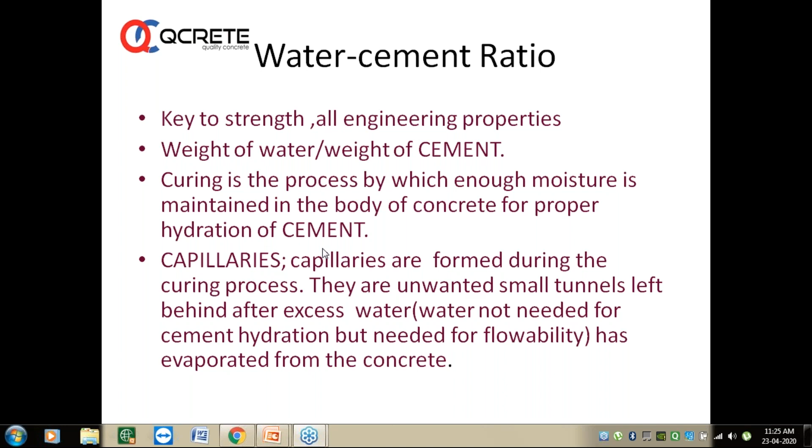So we have come to know the strength of concrete is inversely proportional to water cement ratio, and permeability is directly proportional to water cement ratio.

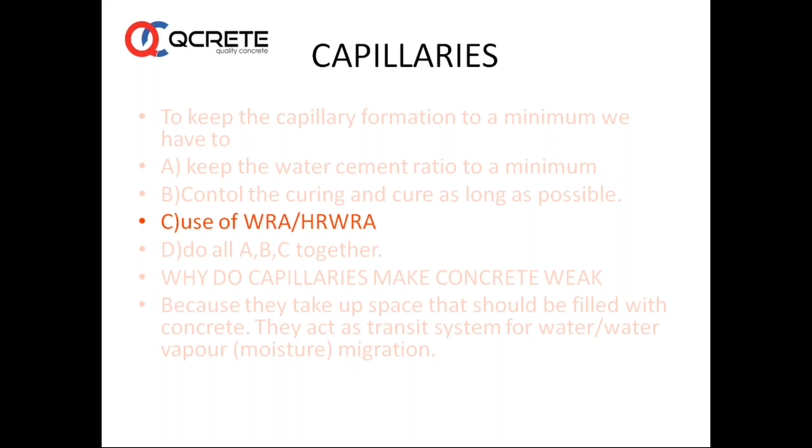In concrete, there are different kinds of pores, which again gives substantiation to the law of water cement ratio. One is capillary pores, which are formed due to physical evaporation of water, and then there are gel pores, which are within the calcium silicate hydrate gel itself, which is a byproduct of cement water hydration. And there are the next set of pores which are formed due to evaporation of water in between the cement paste and aggregate. So there are micropores, there are sedimentary pores.

What are sedimentary pores? Once the aggregate and cement harden, actually the concrete hardens, once this transition zone, the interface between cement paste and the aggregate, becomes weak due to evaporation of water or due to formation of some pores in the transition zone, it will attract more and more water to evaporate through this, and the tunnel or channel becomes bigger and bigger. These are also called sedimentation pores or sedimentary pores.

So there are several kinds of pores. The main important ones are capillary pores and gel pores. Gel pores are formed within the cement paste itself, that is the CSH gel itself. Now it is said that the gel pores are about one third, about 30 to 35% of the total amount of pores formed in the body of concrete.

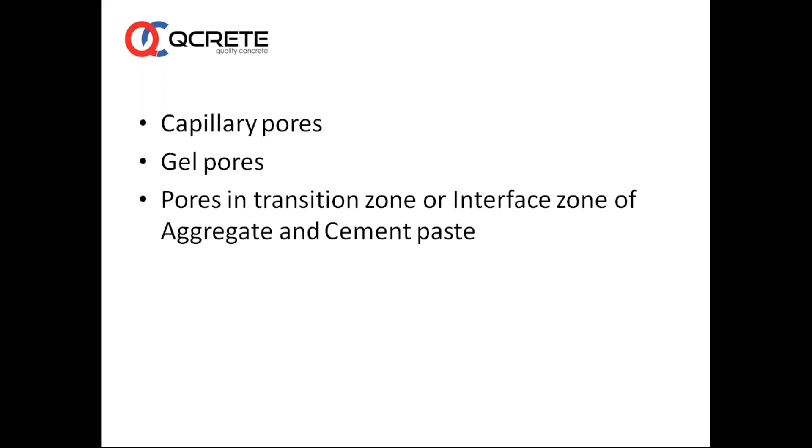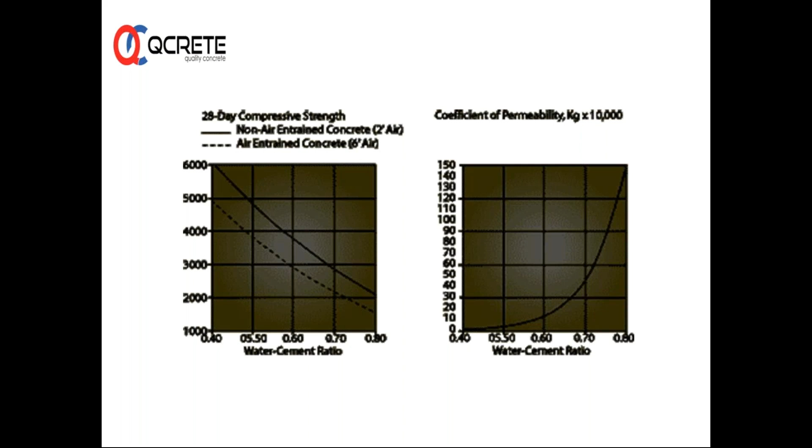So we are again talking about capillary pores. As far as permeability is concerned, it depends on the network of pores: their overall concentration, total volume, interconnectedness, and diameters of pores. The capillary pores are larger in diameter, maybe in microns. The gel pores are in nanometers, very small pores which can only be seen by microscope. Continuity in the network of pores determines permeability. So the concentration of the network, and whether the network is connected, and how the interconnectivity is there, all determine the permeability of concrete, which is very important.

See, more the permeability, lesser the durability. So that is why this factor is important. Next one.

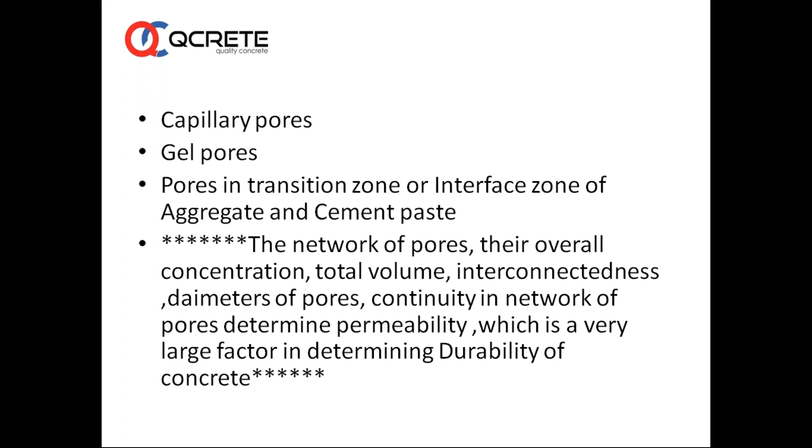So in short, it is completely essential to keep the water cement ratio down to as lower level as possible, to push the concrete to higher durability.

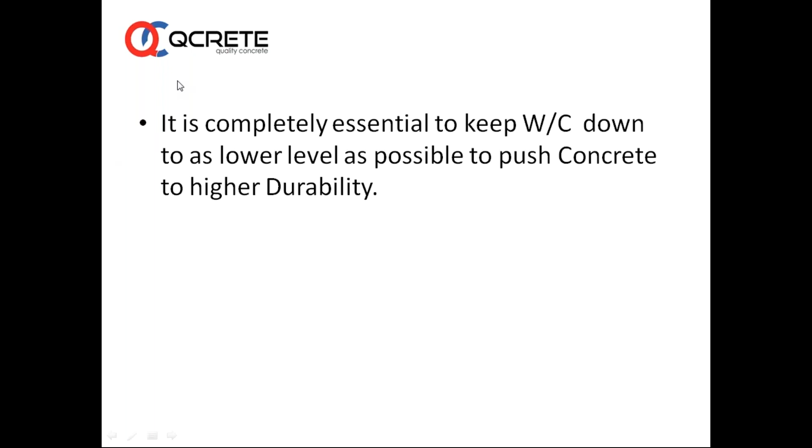OPC is the largest binder material used in concrete worldwide. Since its invention in 1824 by Joseph Aspdin, there have not been much structural changes, I mean there haven't been huge changes in the reactions or chemical compositions that cement is intended to do. There haven't been many changes built in. We agree the manufacturing processes have changed and evolved over time, but OPC remains as OPC for quite a long time now. And OPC has its own inherent problems.

OPC has its own problems. What are the problems with OPC? These problems that we are going to talk about are, you can say, villainous, like villains to the concrete. It underlines that OPC should not be used more, and it also tells us that there's no point in using more and more OPC. So we'll check about those parameters which are harmful to concrete in terms of durability.

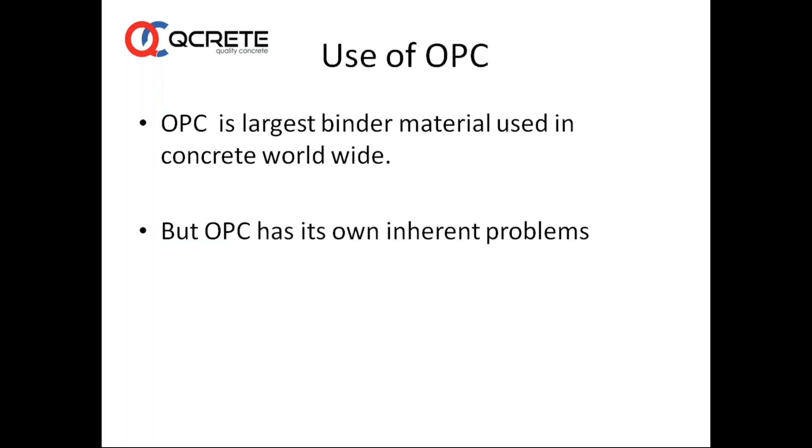So first point is OPC: higher the OPC, higher the heat of hydration. Now it is estimated that a concrete having cement content about 350 kg per cubic meter, and another mix design done at 450 kg per cubic meter - every 100 kg of OPC content increase tends to increase the heat of hydration between 13 to 14 degrees.

So as the cement content goes up, the heat buildup in the body of concrete increases. This is a very big concern in mass foundations, huge structures, thicker structures, raft foundations, bigger beams, bigger columns, high grade concretes - situations where cement contents are more. The problem is that heat buildup will be so much at the center, while heat will be lesser near the surface of the concrete, because the surface is closer to the atmosphere and influenced by it, resulting in lesser temperature. So if the difference between core temperature and surface temperature goes beyond 13 to 15 degrees, thermal cracks will develop in the body of concrete, leading to deterioration of the structure. So heat buildup in OPC mixes is a problem. We need to be very careful, especially if such cements are used in mass foundations, raft foundations, and things like that.

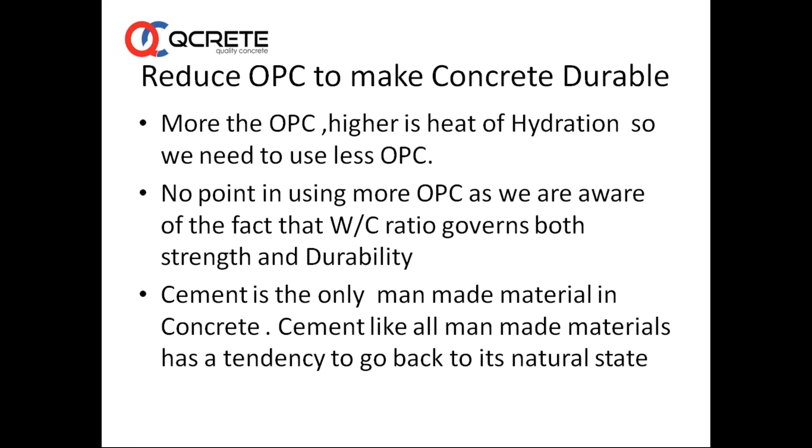Next - OPC production is accompanied by a huge amount of carbon dioxide production, which is a greenhouse gas, and is said to be one of the major factors responsible for global warming. We all know that more carbon dioxide and other gases produced by human activities - automobile industry, burning of fuels for various purposes, and cement production - all these things put together are, you can say, spitting carbon dioxide like venom into the atmosphere, disturbing carbon dioxide levels and other levels in the atmosphere, and being responsible for heat buildup on planet Earth.

It is said that if the same things continue for longer times without any change, by cement producers and other manufacturers manufacturing in such a way that they are all responsible for production of more carbon dioxide, it may lead to higher buildup of heat, which will eventually cause huge amounts of ice to melt in places like Antarctica, wherever the ice is there, and the sea levels are set to go higher, and then coastal areas will be almost submerged, and there will be havoc, mass destruction will happen actually.

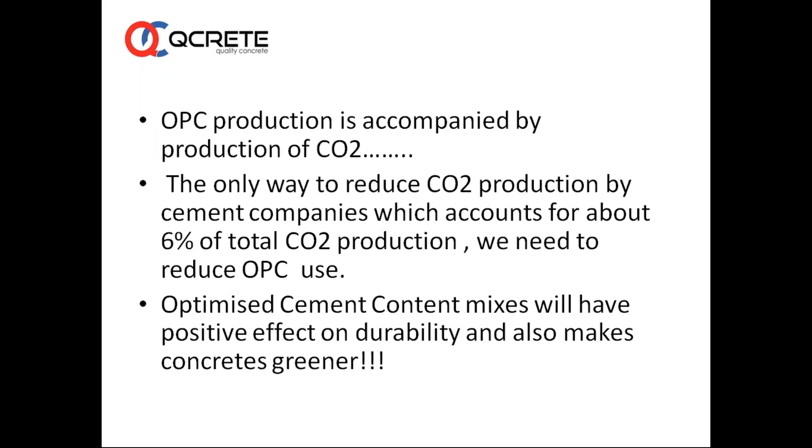So OPC and steel, you could say are on one side, the villains. They have aided taller constructions, bigger constructions. On the other hand, durability is a question mark as far as these materials are concerned. When you have OPC concrete with embedded metal, that is the problem. That is where corrosion starts, and that is where the problem starts.

So, probably the builders of these pyramids knew that they should not use such materials, especially with embedded metals. And that is how they have won a race against time. 5,000 years is not a small time, it is a huge time. These structures have passed their life, against rain, shine, whatever it is.

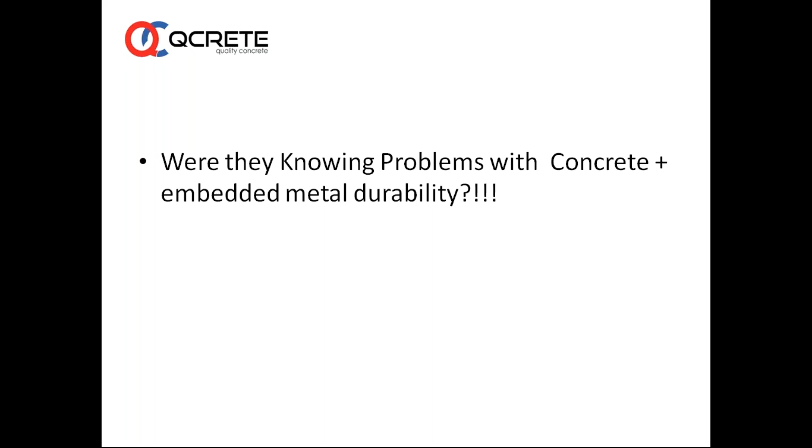So we cannot just reduce the OPC content to make durable concrete. We need the help of chemical admixtures. We need to use a certain dosage of chemical admixtures, HRWRA, whether it is SNF based or PC based or whatever it is, to bring down the water cement ratio. Bringing down the water cement ratio is dependent on the water reducing capability of these admixtures.

PC admixtures, the latest generation of admixtures, give a water reduction of about 30 to 40%. So now it is easy to produce concrete with water cement ratio of 0.25, pumpable concrete, easily placeable flowing concrete, which was never possible earlier. So if you want to push the concrete to higher levels of durability, you need to have low water cement ratio. That can be achieved by using high performance, high range water reducing admixtures.

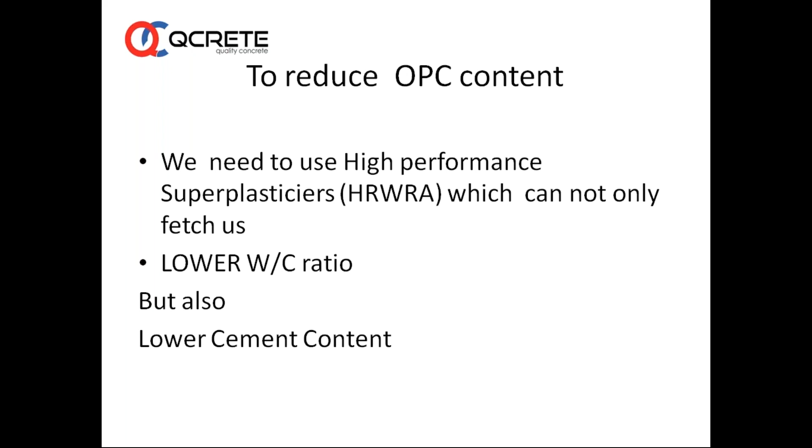The next set of materials which are used to push the concrete to higher level of durability are mineral admixtures. As everybody knows, pozzolanic materials are not a new material.

Pozzolanic materials were first found in a village called Pozzuoli in Italy 2000 years back. Romans used this in a very big way. You have many structures like the Roman Colosseum and other structures, including some non-Roman structures from 300 BC, where it is said they used some form of volcanic ash, mixed with lime and animal blood or other materials like horse hair, to make durable plasters and concrete-like material. So mineral admixtures or pozzolanic materials are not a new phenomenon; they have existed for quite some time now, and they have made a significant impact on the development of durable concrete.

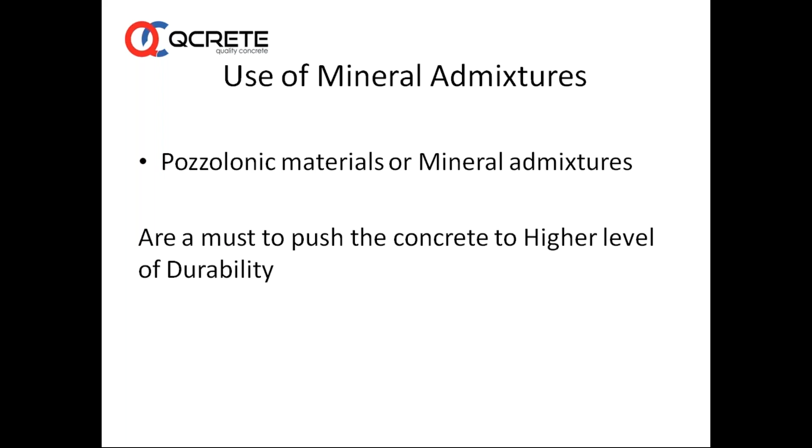So by using SCMs, what benefits do you get to make concrete overall durable? Permeability, resistance to chlorides, resistance to sulfates, carbonation, alkali silica reactivity, drying shrinkage, creep - all these properties are improved significantly or kept at the same level by using SCMs. Some parameters of durability are kept at the same level, whereas many important properties are enhanced significantly, especially permeability, resistance to chloride and sulfates. All these are enhanced significantly when we use SCMs, by which the SCMs push the concrete to a higher degree of durability.

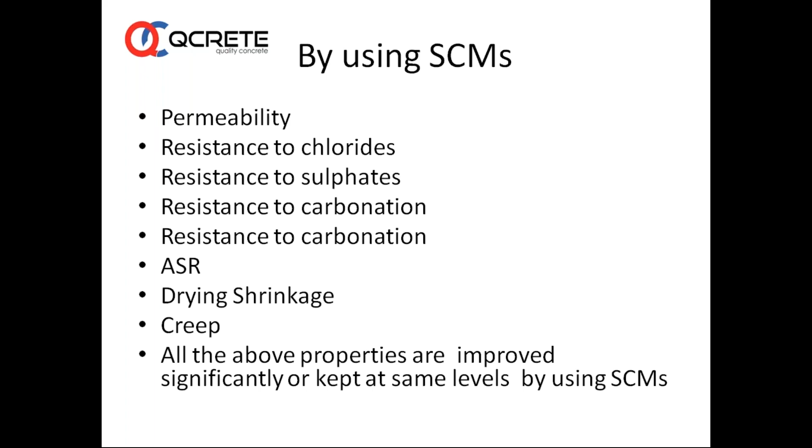So, reduced permeability. When the pozzolanic materials react with the products of hydration of cement, which is free lime or other things, then in the capillaries, further calcium silicate hydrate gel goes on developing and depositing itself, making the concrete denser and denser as time elapses.

So that means concrete with any SCM, whether it is fly ash or GGBS or microsilica or metakaolin or rice husk ash, the phenomenon is almost similar. Small changes will take place, but it is not significant. Whenever you are using any of these materials, there will be secondary hydration going on. Because of the secondary hydration, this calcium silicate gel production will be continuous as long as moisture is present inside the body of concrete, as long as calcium hydroxide is present inside the body of concrete. The reaction will be continuous, and the development of CSH gels will be a continuous ongoing process, a work in progress.

These CSH gels will go on filling up the capillary pores - we already talked about the capillary pores, different types of pores and all. So it will go on filling up these things, and as the concrete ages, the pore volume decreases. Professor R.N. Swamy has talked about this.

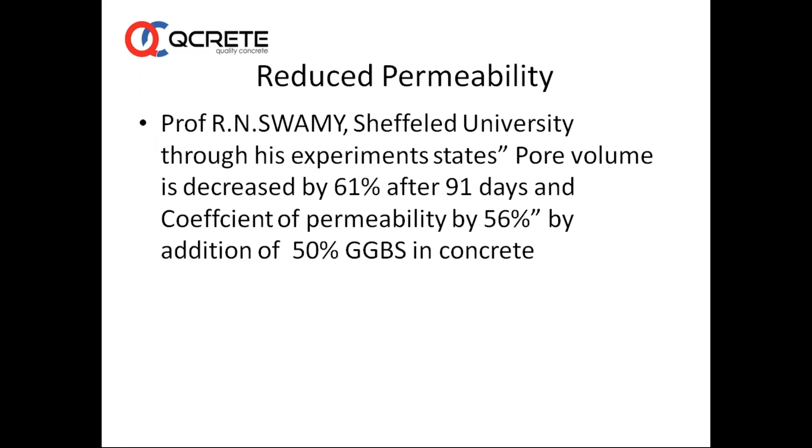The most significant effect of SCMs or pozzolanic materials is in reduction of ingress of chlorides, or in other words, resistance to chlorides is significantly enhanced when we are using SCMs.

There is no way OPC can compete in this section. We need to remember, if you want to make simply a durable concrete, forget about OPC, because we cannot achieve very high levels of chloride resistance with pure OPC. You need to do a lot of trials, a lot of mix designs, to achieve very high resistance to chlorides.

Resistance to chlorides is also measured by ASTM C1202, a test for resistance to chlorides measured in coulombs. A value of 2000 coulombs is said to be moderate, 1000 coulombs is good, 500 is very good, and below 500 is excellent concrete. This single factor alone can indicate that the concrete is going to last a very long time.

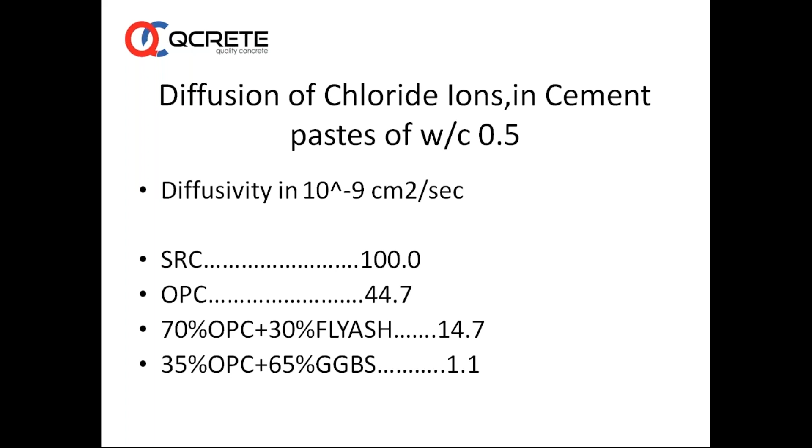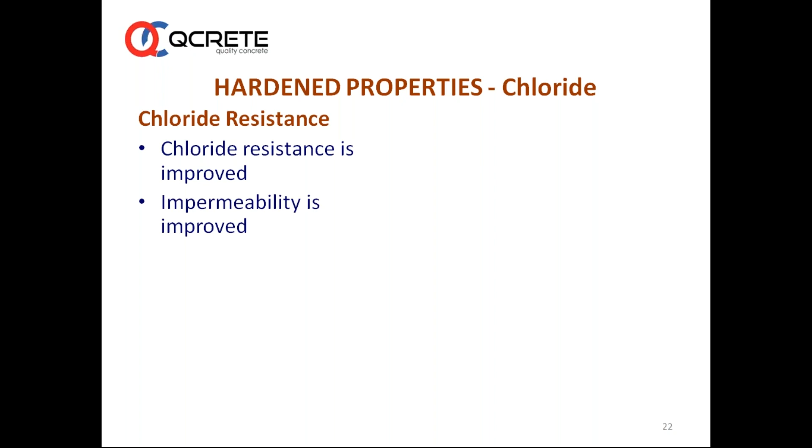This slide shows that at a depth of 25 mm, the chloride content is about 1.75% when using no GGBS or fly ash. But when we use about 60% GGBS, chlorides are almost nil at 25 mm depth - there is no availability of chlorides. So you can see from this graph that the resistance to chlorides is significant, and this is one of the best ways of making concrete durable in an environment with high chloride exposure.

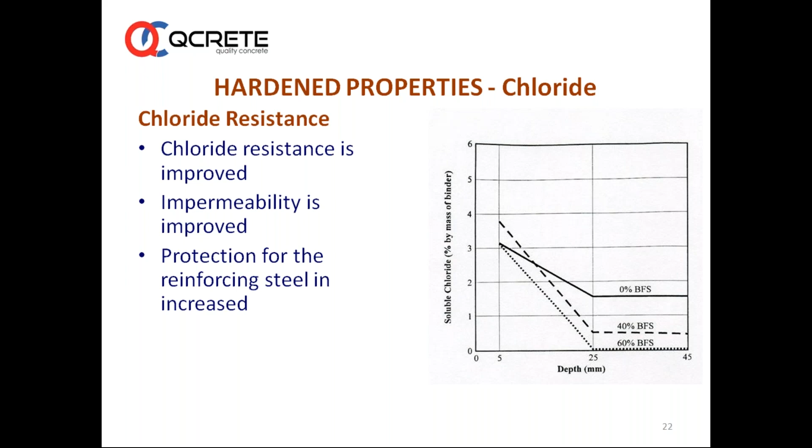It is not necessary to stick to only OPC or fly ash. Depending on what strength and performance you want, you can change the SCMs. By using microsilica and metakaolin, we have reached RCPT values below 500. Permeability as measured by DIN 1048 is less than 20 mm, something like 14 mm or 16 mm, which indicates the concrete is pushed to a very high level of durability. Such RCPT values below 500 can be easily achieved using SCMs, and it is very difficult - not impossible, but very difficult - to achieve with only OPC.

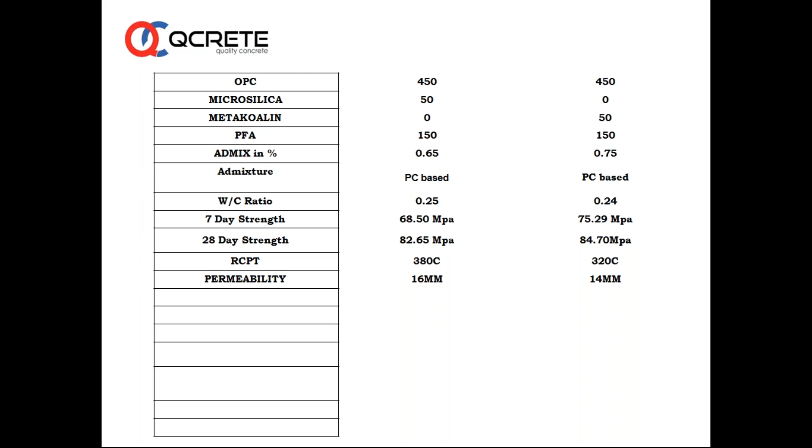Sulfate resistance is another activity that occurs when calcium hydroxide and available products like monosulfates are attacked by external agencies like sulfates. There are several forms of sulfate attack, and in situations where there are a lot of sulfates in soil and water, you want to protect the concrete.

The best way is to go for SCMs, where you can make the concrete more durable - either use fly ash or GGBS. Here the example given is from fly ash. GP represents general purpose cement, that is ordinary Portland cement. Using 20% or 40% fly ash - in India, the Indian codes allow up to 35%, but these trials were done elsewhere - you can see that fly ash up to 20% or 40% has significantly changed the resistance to sulfates. So if you want to make the concrete more durable, remember to use SCM, either GGBS or fly ash.

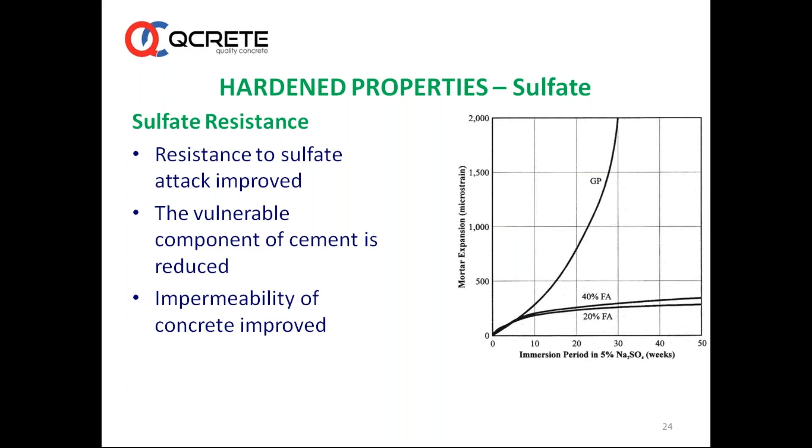We already touched on heat buildup. SCMs react more slowly because they wait for calcium hydroxide to form, and the SiO2 of SCMs or pozzolanic materials will meet the calcium hydroxide and start consuming it to form further calcium silicate hydrate gel. So there is a delay in heat buildup. For all mass concretes and mass foundations, the preferred material is either 70% GGBS plus 30% OPC, or a minimum of 35 to 40% fly ash. All these higher replacements have been found to significantly contain heat buildup.

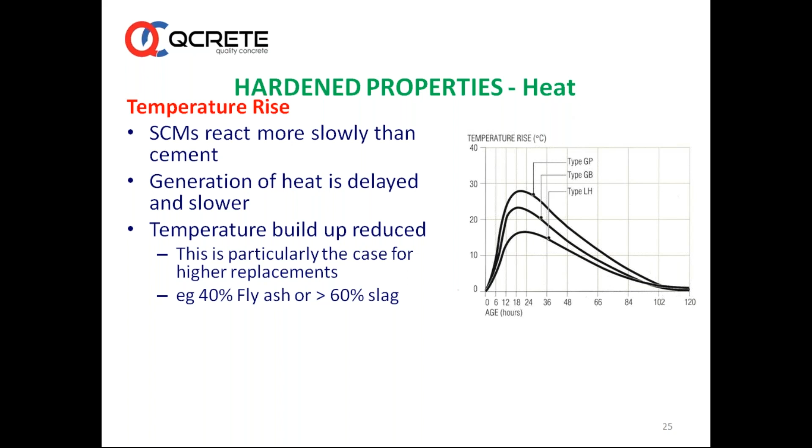When we are pushing concrete toward durability by reducing the water-cement ratio, using chemical admixtures, and using SCMs, one of the side effects is long-term strength. The long-term strength after 28 days is significantly improved when using SCMs. So for a customer purchasing concrete with OPC-GGBS or OPC-fly ash, he needs to be aware that he is getting material with higher strength, achieved at around 90 days. This is another benefit, you can say a side effect, of using SCMs. While durability is the goal, you also get an unexpected gift of much higher strength as the concrete ages.

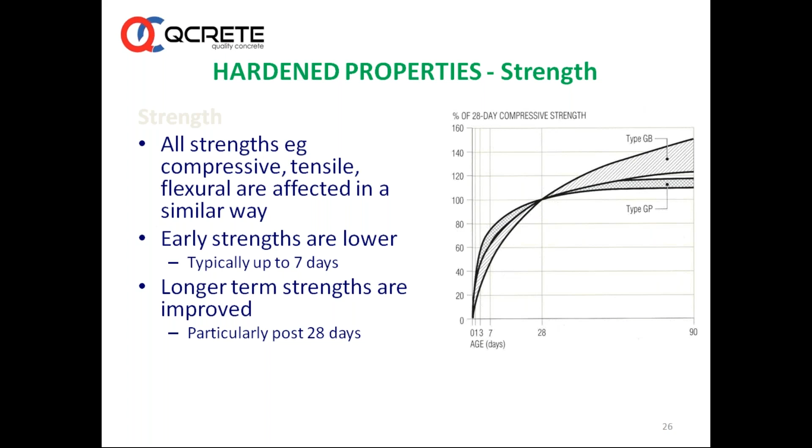The long-term strength depends upon the fineness of fly ash, fineness of GGBS, how they react with the particular brand of OPC, fineness of OPC, and so on. If the fineness of all these materials is very high, most of the strength is achieved quickly, and the long-term gain may be stunted. If the fineness is controlled and not too high, the long-term strengths are better, because the pozzolanic reactions proceed slowly. It is said these reactions continue as long as free lime is available in the body of concrete, and some researchers say they can continue for 30 to 40 years.

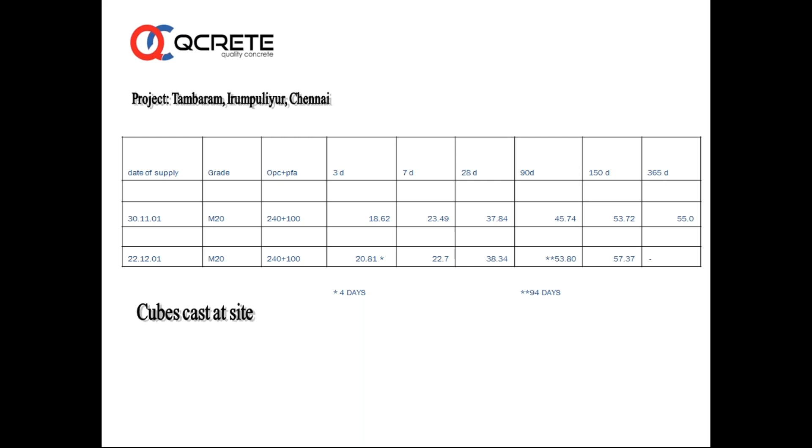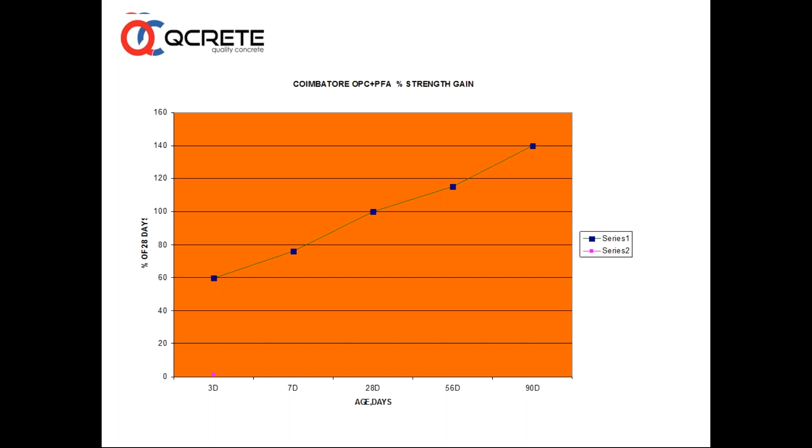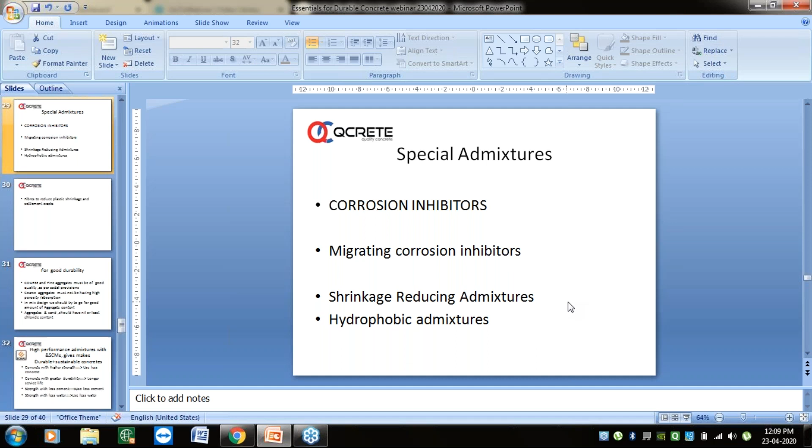If you want to make concrete even more durable, you can also use corrosion inhibitors. Calcium nitrite based corrosion inhibitors significantly enhance corrosion resistance, and are used in concrete in many places, especially Gulf countries, where a lot of pile foundations are done and there are high sulfates and chlorides. These corrosion inhibitors are used in large quantities, for example calcium nitrite based corrosion inhibitor at a dosage of about 10 to 15 liters per cubic meter. So apart from the added durability from SCMs and lower water-cement ratio achieved using chemical admixtures, you can also add corrosion inhibitors to make concrete more durable.

You also have other kinds of corrosion inhibitors, or migrating corrosion inhibitors. You have shrinkage reducing admixtures - shrinkage is always a problem, especially drying shrinkage - so you have drying shrinkage admixtures. You have hydrophobic admixtures which coat the capillary pores and prevent water or other materials from getting in, making the concrete more impermeable and hence more durable. There are many different varieties of hydrophobic admixtures that can make concrete more durable. You also have what is called super hydrophobic concrete surface, achieved by using more of these kinds of additives.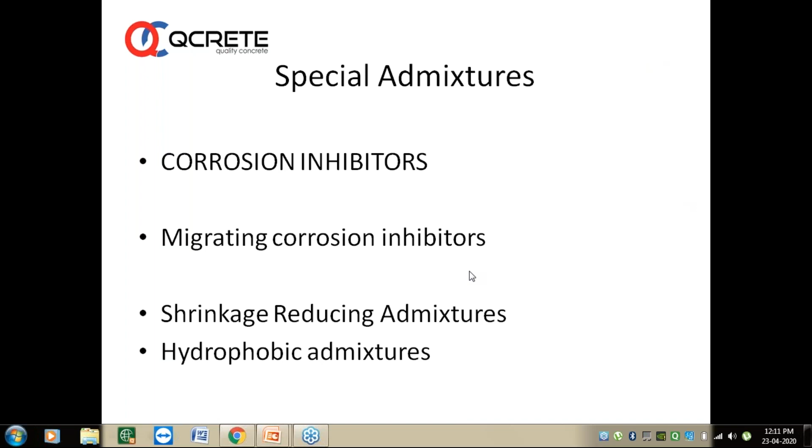Plastic shrinkage and plastic settlement cracks, even though they are formed in the initial stage and do not disturb the integrity of the concrete structure, different fibers, whether polypropylene or steel fibers, will add to fatigue resistance, impact resistance, and some authors claim a small increase in impermeability, tensile strength, and all this enhancement takes place.

Overall durability also increases by using these materials, especially in tropical climates where plastic shrinkage and settlement cracks, if not treated, may lead to ingress of materials. So synthetic fibers like polyester or polypropylene can minimize the formation of these cracks, and hence increase durability, because we need not treat these concretes again with waterproofing, reducing the ingress of materials. So these materials can be used for enhancing the durability of concrete.

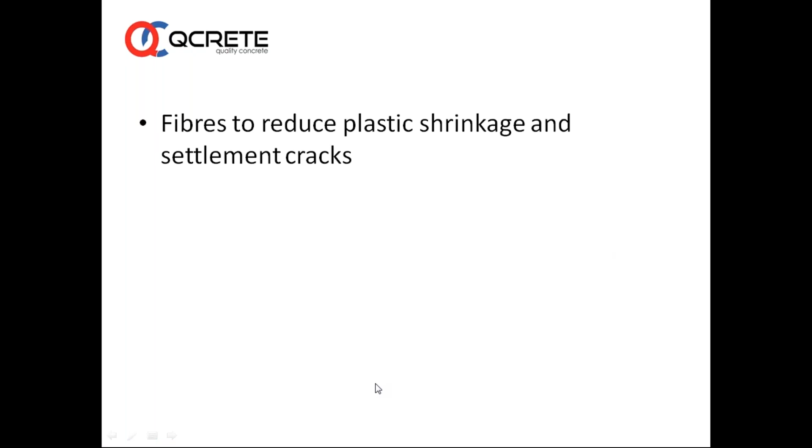Whenever we are selecting coarse aggregates and fine aggregates, they have to be as per codal provisions. If we have coarse aggregates with high absorption, it will cause problems in durability, especially related to drying shrinkage and creep. So we need to take care of the aggregate content. If the aggregate content is more, generally the dimensional stability and durability of concrete is said to be better. When we talk about pumpable concrete, we have a tendency to keep increasing the sand content.

So we have a choice. If we want to increase sand content, we have to decrease the water cement ratio to counter the effect of higher sand content. So aggregate content has to be managed judiciously, especially for durable concrete. We need to consider both the aggregate content and the quality of aggregates.

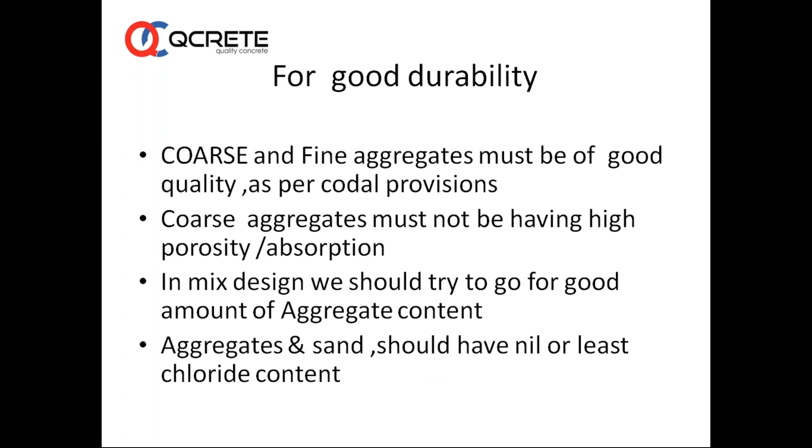What type of concretes are we trying to use when we want durable concrete? When we have concrete with higher strength, it gives a choice for the designer to use lesser concrete, occupying less space and using fewer ingredients.

Concrete with higher durability means the service life of such structures will be more, and you need not go on repairing regularly. You have a choice to use lesser cement. Every ton of cement requires about 1.5 to 1.6 tons of limestone, so quarrying, crushing, and transporting this is a strenuous process. Also burning these materials at about 1450 degrees and producing carbon dioxide is not sustainable. So using lesser cement makes concrete more sustainable, and preserves limestone quarries and deposits.

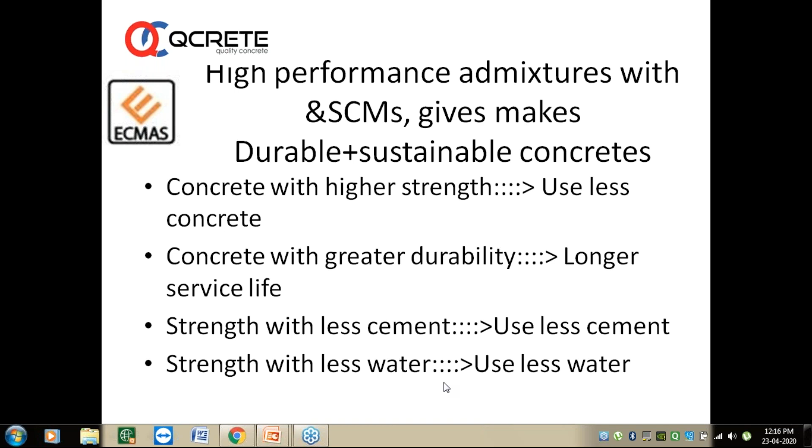When you make a high slump concrete, a highly fluid, highly pumpable concrete, the energy required for transportation and batching is reduced, so it's more sustainable. SCC is a big shift in concrete production and technology as a whole, since you avoid vibration and human interference in placing concrete, automatically pushing it to higher durability.

Most SCC concretes contain SCMs and low water cement ratios around 0.35 to 0.4 or 0.5, pushing the concrete to higher durability and sustainability. There will not be honeycombs, and such concretes move more toward high performance concrete. So concretes designed this way will be durable, sustainable, with least honeycombing and high performance. That is how these concretes can be taken to a higher level.

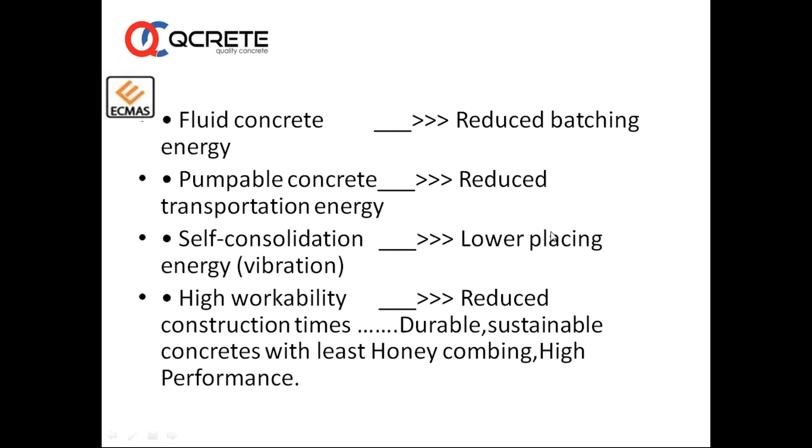So we talked about the materials. We talked about the selection of materials. We talked something about mix design. We talked about what durability factors can be enhanced by using SCMs and SCMs in conjunction with high performance superplasticizer. We talked about those things. But that is only one portion actually. That is only one portion. We have

Production related factors which can go wrong, factors which has to be taken care during production and before production. So QAQC at batching plant or in a concrete producer's facility is to be looked into actually.

Whenever you are having a comprehensive QAQC system, it can be divided into three categories: forward control, immediate control, retrospective control. Forward control is a set of all activities that take place in a production facility before production. It is mostly related to QA. Immediate control is set of all activities that take place at the point of production. Retrospective control is those activities which take place after production, which cannot be done before production, which cannot be looked into or looked after before production.

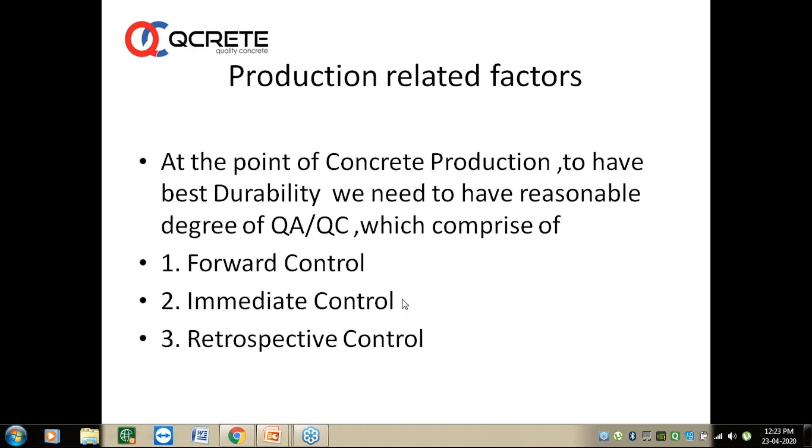Next. So once the concrete is mixed, you have a shelf life or a usable life of about 2 hours. IS 4926 clearly says once the concrete is mixed, you have to use within 2 hours, unless otherwise you have used a superplasticizer cum retarder, or you are using the concrete in winter conditions. That's what IS very clearly says.

So you need to use the concrete once produced within 2 hours after the water has come in touch with the cement. So there may be some cases where you want to use the concrete for 4 hours or more than 4 hours. Then there should be proper trials conducted and proper data generated, and it has to be approved by the customer. Then you can use, you can change that one. Otherwise, the general trend is you need to use the concrete as early as possible.

Since most of the concretes in India are used with superplasticizer cum retarder, we have type G as per ASTM C494 type of admixture, where it allows the concrete to be transported and placed, and it has a setting time enhancement of plus 3 hours over control. So 3 hours extra it gives against the control concrete.

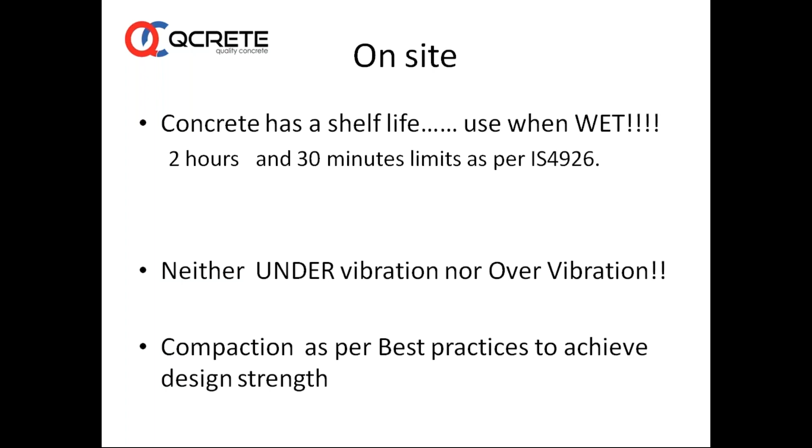The other point we need to take care of is proper curing. Initial curing, as soon as the concrete is placed, within about 1.5 to 2 hours depending upon temperature, wind velocity, and humidity, you should start curing. We should start curing with a pesticide sprayer to keep the concrete cooler, then you can spread a plastic sheeting.

We should avoid direct contact with sunlight, and also avoid the wind effect. High speed winds take away the water, and when the rate of evaporation is greater than the rate of bleeding, plastic shrinkage cracks and plastic settlement cracks may occur. So we need to keep the rate of evaporation as low as possible, lesser than the rate of bleeding.

You can use evaporation reducers, you can use a curing compound, but the best way of curing is said to be water ponding. Curing with natural water is said to be the best method.

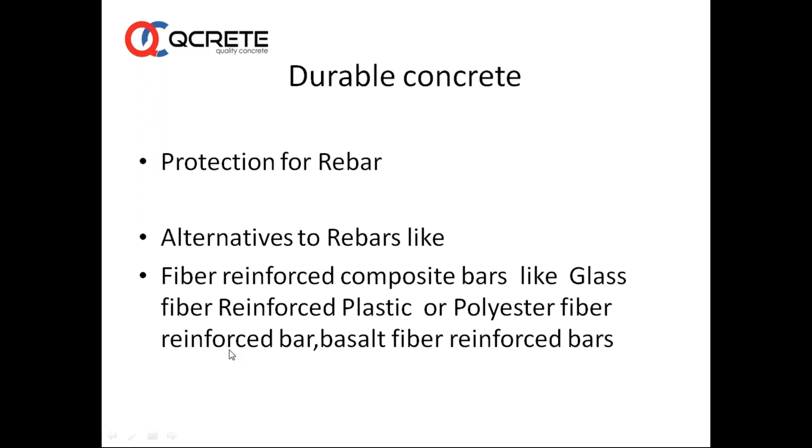This is becoming more popular and more acceptable. Next one. Next slide, madam.

Now, Dr. Henk Jonkers, from 2006 to 2015, made a lot of efforts to invent a material called self-healing concrete additive. Basically, this product is based on bacteria. Some selected species of bacteria was taken, and it is encapsulated in some material, in some polymers.

This material can be added at a certain percentage, like 1%, 1.5% of the total weight of concrete, say about 5 kg or 10 kg per cubic meter. The beauty of this product is the bacteria encapsulated in these polymers.

They are mixed during production of concrete, and once the concrete sets, if there is any crack in the body of concrete, once water and oxygen enter through the crack and touch these capsules having bacteria, they open up and react with this oxygen and water to precipitate and generate some products close to calcium hydroxide or calcium carbonate, which will fill up the cracks.